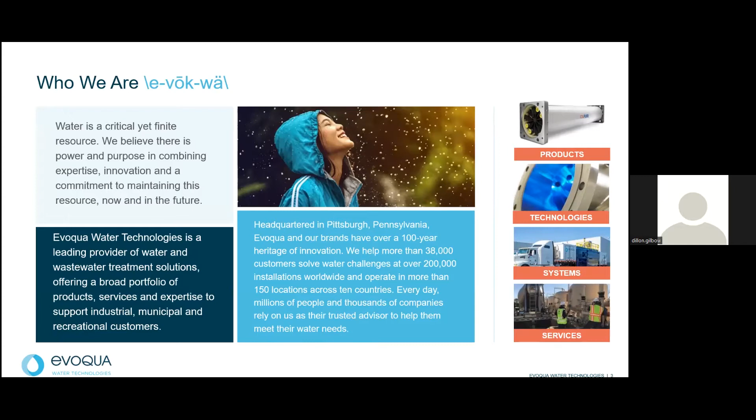So Evoqua, we've gone through a number of different iterations. We probably have about 300 plus brands of water treatment companies that we have acquired over a 100+ year timeline. And really our core focus is bringing products, technologies, integrated systems and services to approach water treatment in a holistic manner. And we bring that approach into a number of different markets. What's really nice is that we're able to share best practices across different industries, so we're able to learn from the oil and gas industry and apply that to drinking water.

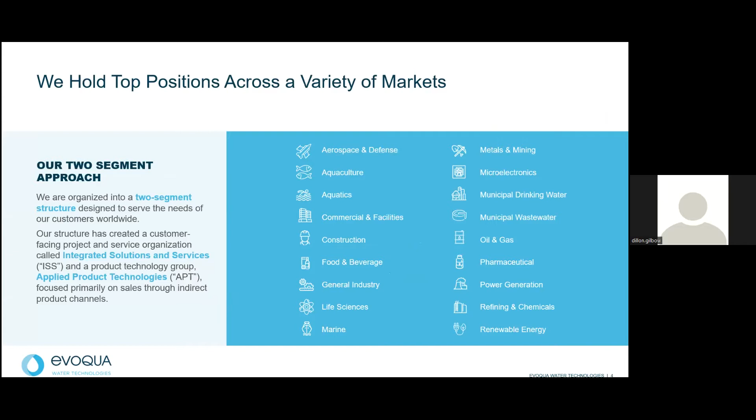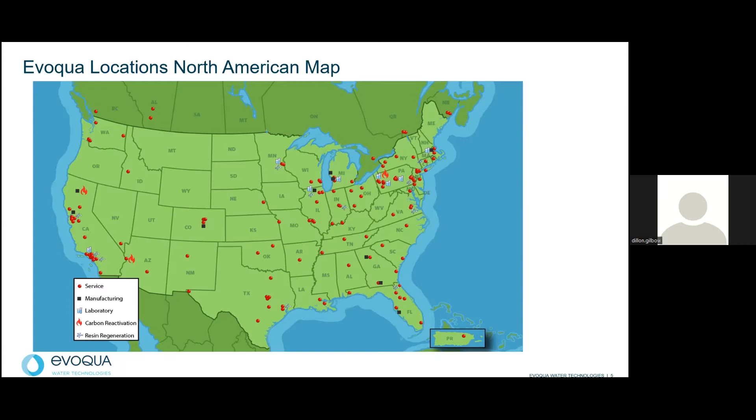We have a number of different locations throughout the states. We've got a good amount in the Midwest. I think this map can actually be updated. We have some more manufacturing up in Michigan over in Ludington where we build some integrated systems out. We've got a number of carbon reactivation plants. The one closest is over in Darlington, Pennsylvania. We have 2 others out west. We also have a number of ion exchange regeneration facilities.

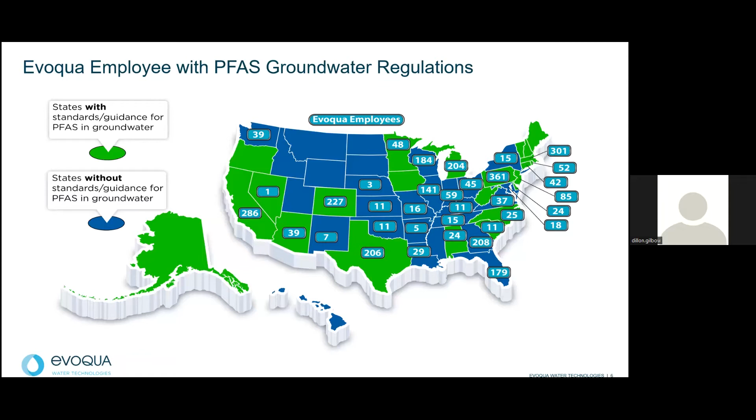One thing I do want to note, we do have 184 employees in Wisconsin through our branches in Milwaukee and Waukesha, and then we've got some other people spread out across. We also have a number of employees in states that are also actively dealing with PFAS. So really, we just want to say that we are heavily invested in ensuring clean drinking water and wastewater throughout the states for our employees as well.

So the key difference in our division from some of our other divisions is we get full reign across the market to keep the nasties out of the environment. So we're the environmental stewards of Evoqua, and that touches everything from 1,4-dioxane, nitrates, perchlorates, chlorinated solvents, all the way to PFAS.

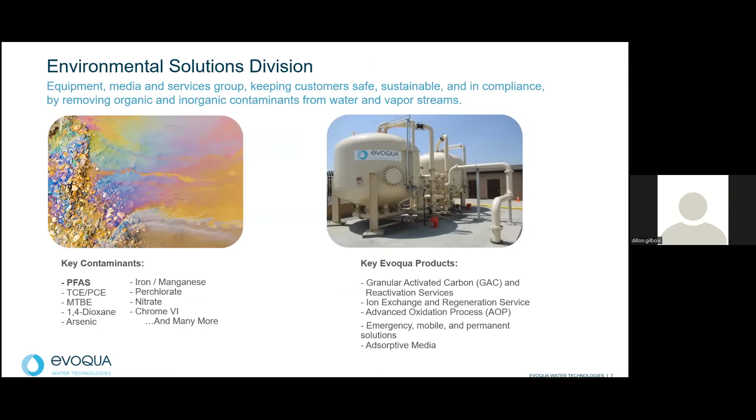So jumping into our PFAS solutions and our efforts to maintain an unbiased solutions-based approach, we try to make sure that we can supply any and all different types of PFAS treatment technologies. On this slide, I am missing the novel sorbents. We're also quite excited about Fluoro-Sorb and some of the other technologies coming out in the market, and we're also actively testing and validating those different medias.

Just a quick high-level run through of the pros and cons. Activated carbon is a relatively cost competitive product. It also removes other co-contaminants. There's also an improvement on the taste and quality of your water once you use it. It does take up a large footprint.

So moving to ion exchange, it's a much lower empty bed contact time, so much less space required. One thing that I will note is that we only supply single pass, so it's one and done usage, but it does end up being more competitive sometimes in certain applications, just because it can remove so much more PFAS than granular activated carbon. RO membranes, I always get the question, should we use RO membranes? I usually answer mostly no. The reject stream usually just concentrates up a PFAS stream, and it's another waste to deal with.

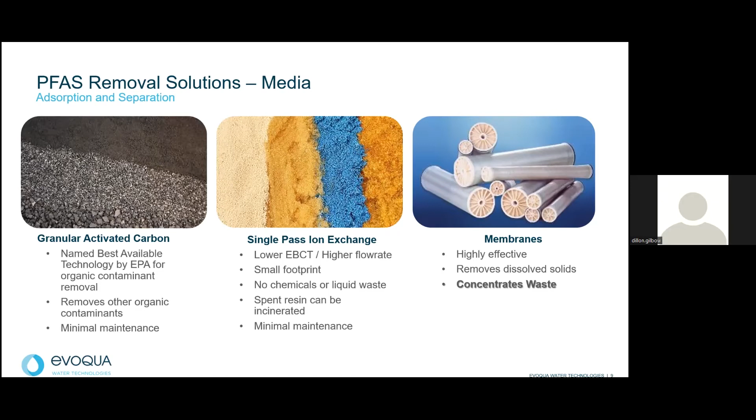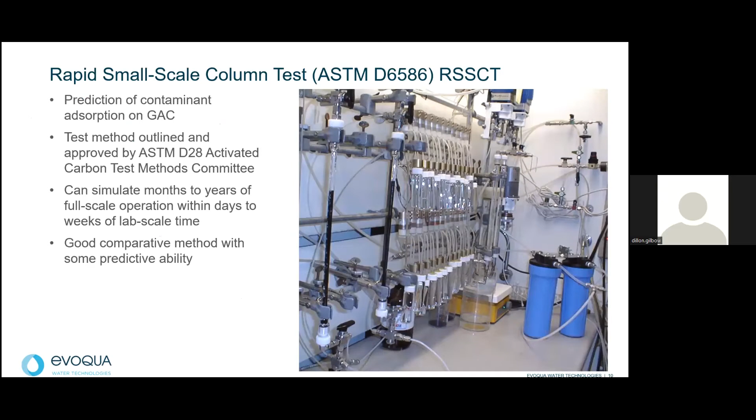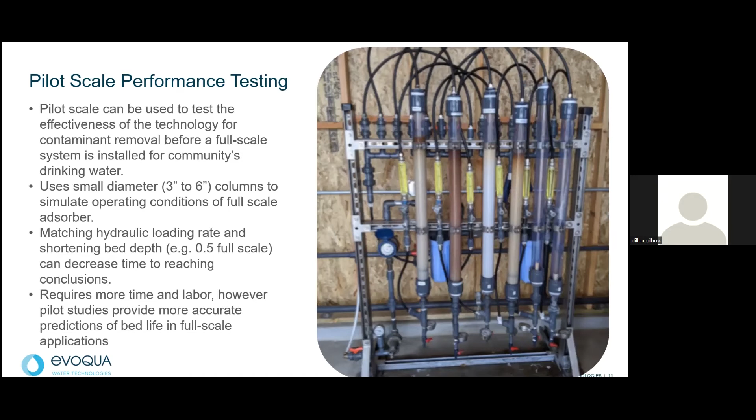We also have a big rental fleet of small vessels. So for quick need deployment, we've got rental assets on hand. We also have large 10, 20, 30, 40,000 pound, even all the way up to 60,000 pound carbon adsorbers.

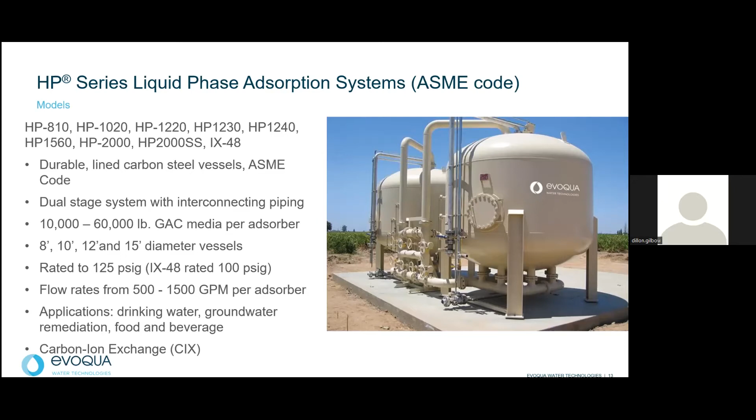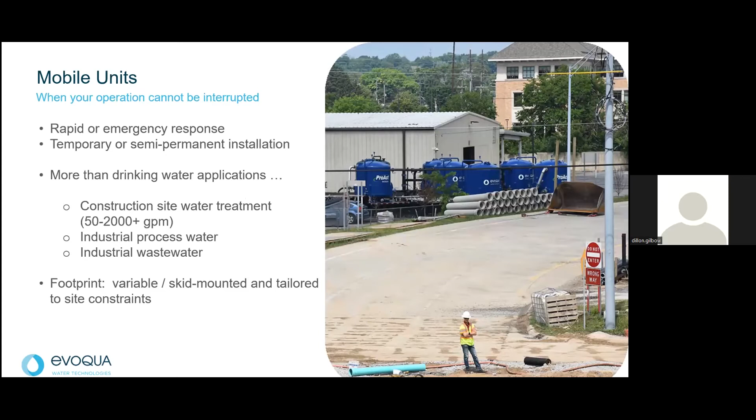One plug I will put here is we've got a CIX, which is a carbon ion exchange product coming out, where we can basically build these tanks where you can change different medias over time and keep that changeover very easy to do, requiring minimal time to get inside the tanks. That way, if you start and say carbon is the best solution at the time, but you fast forward a few years and find that resin might be more effective due to supply chain issues or cost changes, then you can actually do that switch and make sure that your system stays optimized. So that's a key differentiator we have, is that we make tanks that can change between different medias, including novel sorbents. We also are able to integrate all of our systems onto mobile platforms and support them with operations 24/7. So I've got a really nice case study I'll go through on these units here.

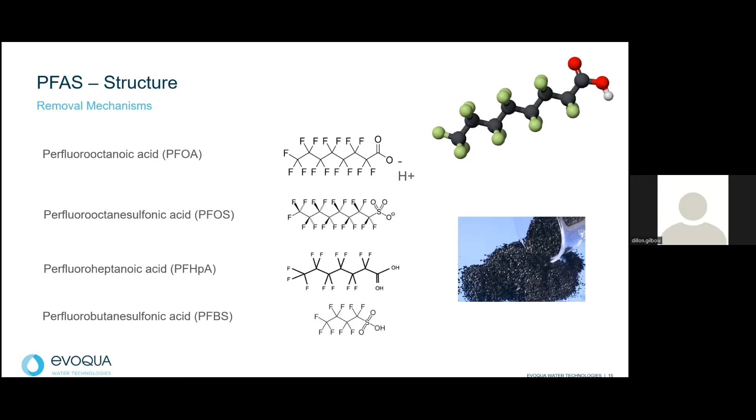So as mentioned, design considerations, things we'll want to take into account when putting systems together. The contaminant profile: is this going to be something where you're going to get a lot of PFOA, PFOS? Is this going to be an AFFF, where we're going to get a lot of PFHxS and some other telomers? That'll be important to designing your system. The contaminant concentration: if we're talking part per million heavy loading, then you may want to look at foam fractionation or some other solutions out there.

Competitive adsorption: if you've got other organic compounds that are going to compete with carbon, or a lot of other anions present, that will compete with your resin. Your pre-treatment requirements will also be important, especially in wastewater. If there is high TOC, high TDS, high TSS, you're likely going to have to put in some form of pre-treatment. So we like to look at bringing everything from sand filters to ultrafilters to help minimize the effect of the noise in those complex matrices of wastewater.

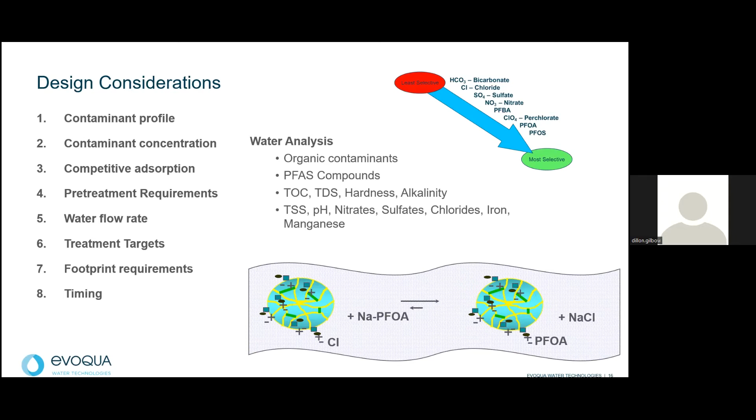So another thing I'd like to go over is just our general approaches to remediation and emergency response. For remediation, I think site investigation is going to be very important. This is where you're really going to lean on your environmental consultants to determine the source, the actual size of the contamination, and have some good solid data where you can actually design a system around it and not have any surprises when you start running your system.

I also think good project team selection is important. Understanding the best consultants out in the market, the contractors who are going to be working on these jobs, the vendors available, and the labs. You want to make sure that you've got a good team and that everyone's kind of singing together in harmony there. Again, you also want to think about the design considerations mentioned earlier.

On emergency response, I really think one thing that a lot of people miss is containment of whatever water is contaminated. Typically, I see fire response as being the big emergency response type application. So making sure you contain all that water, either in frac tanks, tank farms, anything like that, and making sure that you're not getting any migration offsite is very key.

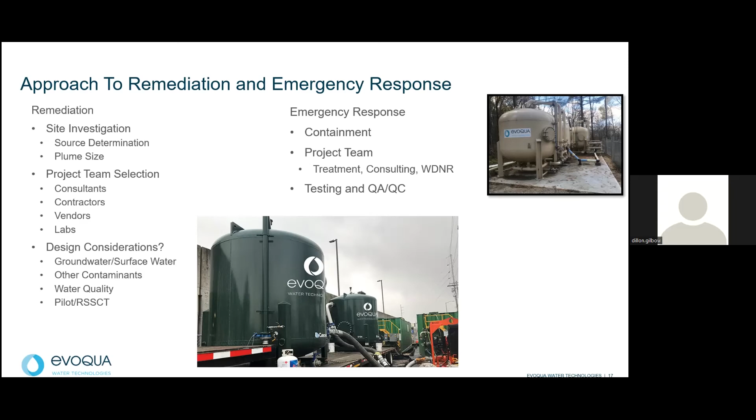Also, your project team, I think you should do a good job of talking to the DNR, making sure that everything's transparent and that you're getting as much help as possible. And then also QA/QC validation. I think that is something that a lot of people miss. These labs are testing down to the part per trillion levels for PFAS, so there's a lot of error that can pop up. So having a good QA/QC review is absolutely critical.

And then just quick case studies. This one's a construction site, sort of a brownfield type application where we had a contractor putting in foundation work and going below the water table. They had well points installed, and there were low levels of PFAS in the water. This was in a state that is very sensitive to any PFAS being put into any POTWs, any sewers. So the city actually said, hey, let's get some carbon treatment out there.

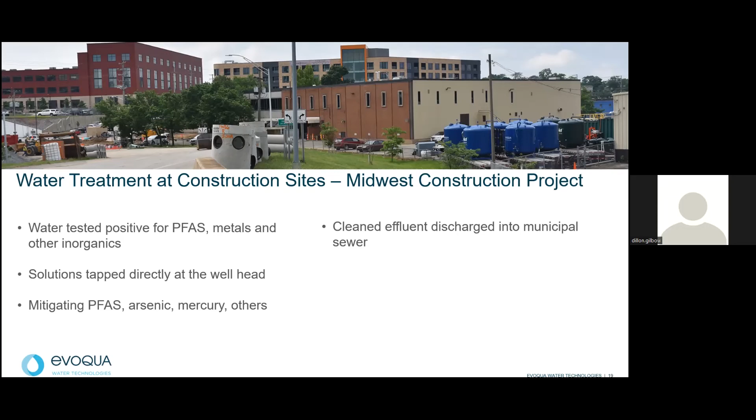If you can see on the top right area, we've got about 10,000 pound carbon units. We also have some pumps, some frac tanks, some bag filters, some pre-treatment to make sure the carbon does its job. And this was a site where we were, I believe, over the summer, treating millions and millions of gallons of water quite successfully. So it just shows how we can respond, get out quickly, get going, and fully support it with an operations team.

This one's a cool one. This is a Midwest automotive manufacturer that had a fire.

They quenched the fire with AFFF foam, and then that water went into a waste sump and mixed in with about 500,000 gallons of water. So we worked directly with the client to put together a treatment scheme. We had some bag filters, some small carbon tanks. We loaded up with some specialty media that we knew would work well for PFAS removal.

One of the things that we did, focusing on that containment side, is we partnered with a local frac tank supplier to basically start pumping and treating into a small frac tank farm, taking samples of that water, having it validated in a lab to say, yes, it's clean water, before it was discharged into another holding tank.

So we did that. We treated 500,000 gallons of water pretty successfully, but we did have some analytical come back with about 1.3 parts per trillion of PFHxA. So luckily the person I was dealing with was also a chemist and understood that there's challenges with analytical that low. And I said, listen, let me reach out to a consulting chemist I know and have them take a quick look. And feedback I got from that consultant was, oh yeah, that's a common lab error.

So got them connected, had a quick, great conversation, and they pushed back on the city's POTW, and they said, we don't care. There's PFAS in here. We're not taking it. So we actually went back to the board and said, hey, they asked us, would this be a good use for our fire water? And we said, absolutely, let's recycle it. So it was kind of a unique management of that treated water to make sure none of it goes off site. So now that will be used for future fire water purposes.

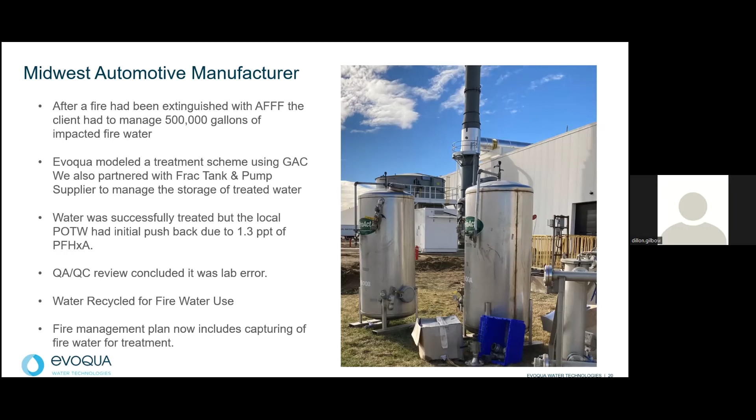Then just a quick wrap up. Again, we like to think of ourselves as a solutions provider, not an equipment or media provider. We enjoy working with consultants, contractors. I think working together as a team is very critical on these projects, because I know lots of people say they are experts. No one truly, in my opinion, is a true expert, because this is an emerging contaminant. There's still much to learn. There's still treatment technologies that are in development and validation. So I think keeping this as a team effort will be beneficial for everyone involved.

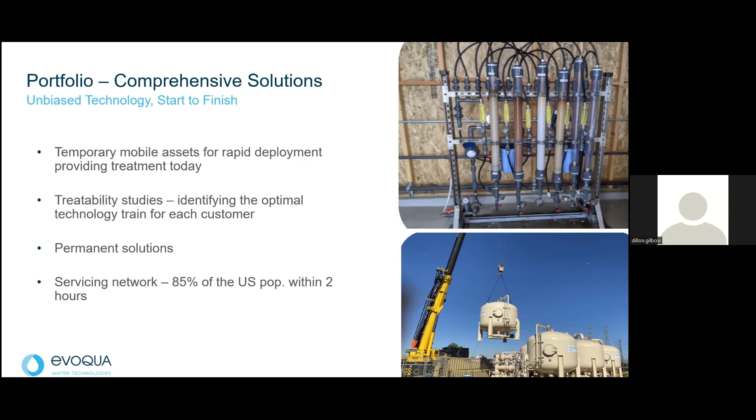We also will do everything from rental skids all the way up to these large permanent systems shown here. And we actually have a pretty good local network here in Wisconsin to help support folks treat PFAS.